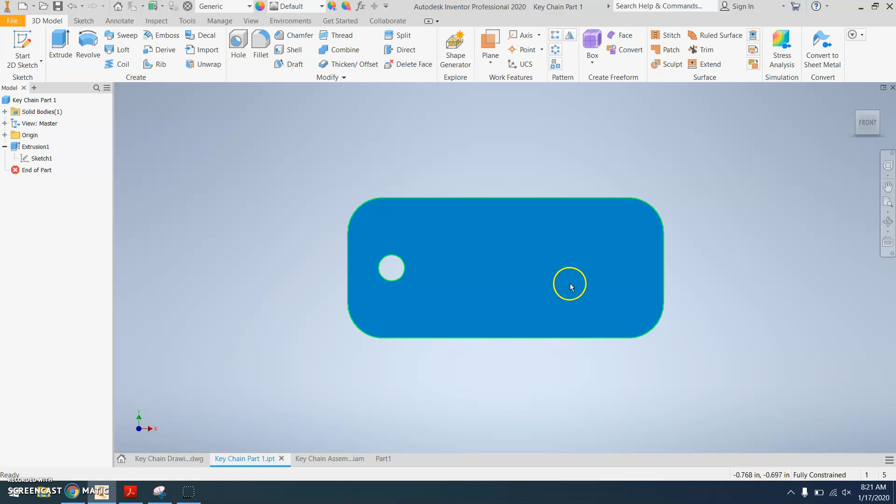First off, I'm going to show you how to do the base of your keychain. You're welcome to use whatever shape you'd like, but this is for those of you that need extra practice or are having a difficult time coming up with ideas.

So, File, New, Part, do a 2D sketch, choose a plane, and then use the rectangle tool. I made mine 2.25 - if you hit the tab key, it'll go to the other dimension - and I made this 1.

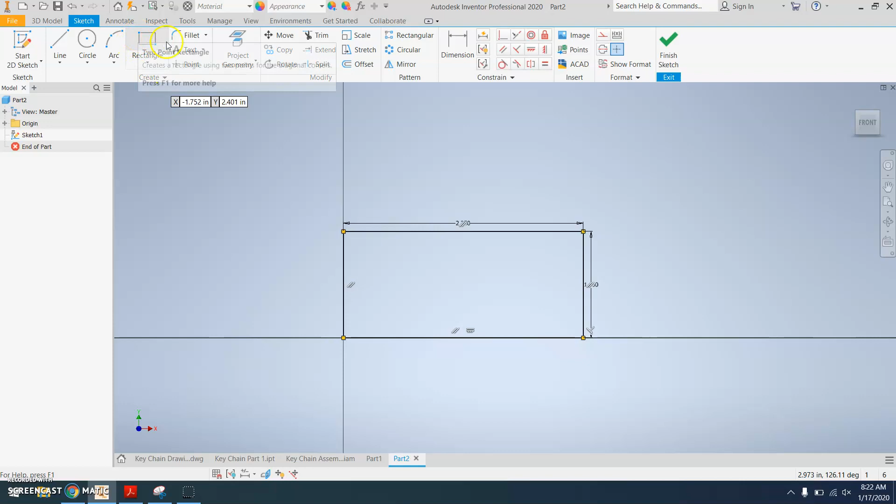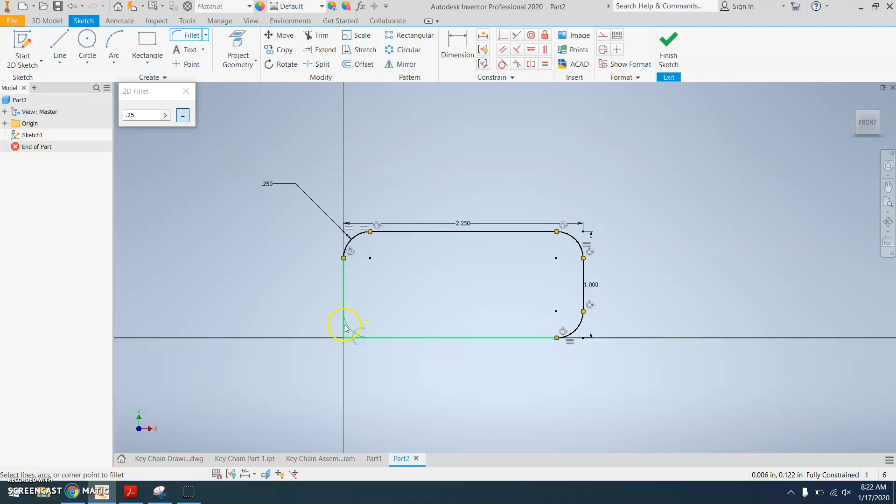So you have the outline. Now, the next step is I rounded the corners. You'll see there's a fillet button that does this. You need to give it a number for the radius you want to round, which I used 1/4 of an inch, which is 0.25, and then you touch on the two lines where they meet, and it rounds it where they meet. Okay, hit the enter button, or just get out of there, I guess.

Next, you need a hole. See how it kind of snaps to the center there? You don't want it snapping to this stuff - that's not good. So then you want this to be 3/16.

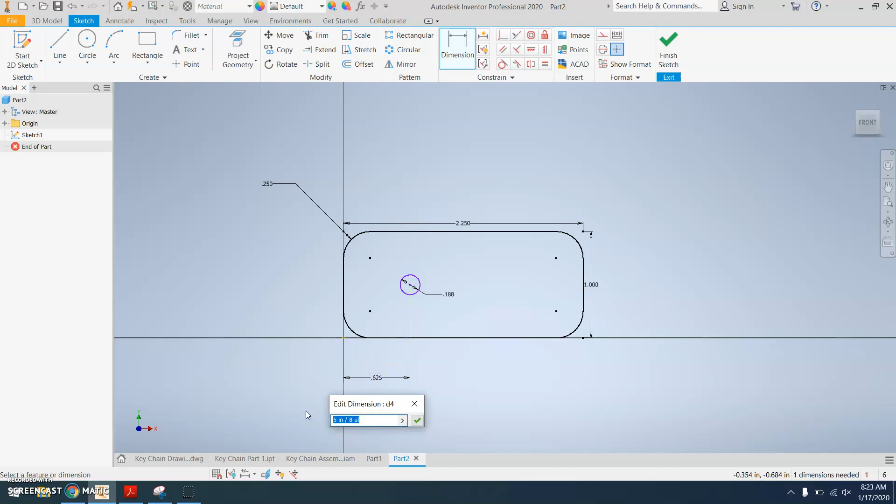Dimension it from this end. It's going to be 5/8 of an inch. And, oh, my bad - double click on that, 5/16. And let's see, I think it already snapped to the middle, but yep, it did. So that is all good.

So we've got the base, fairly good shape here. Now you can put other shapes in here to cut out.

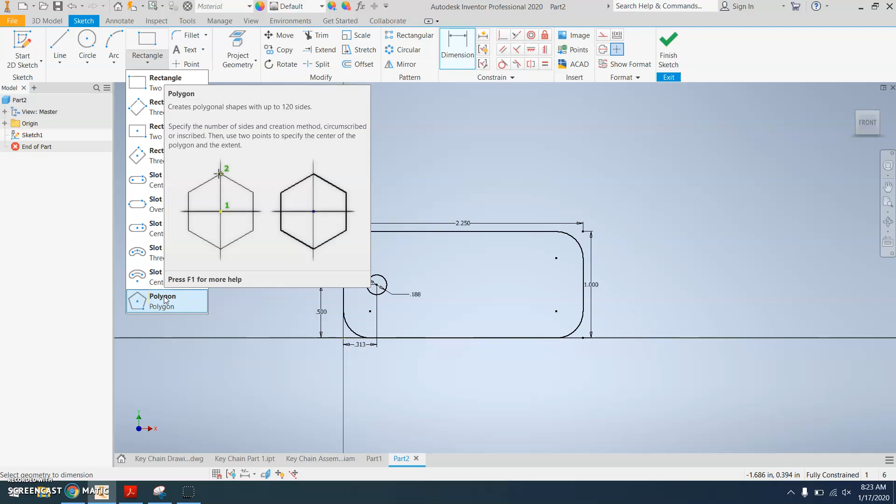I haven't shown you guys this before, but notice there are other shapes you can do, like slot, polygon - if you choose this one, you can do a polygon with whatever number of sides you want. Notice it says 120 max, that's a lot. So you can do different shapes. I think if you looked around, you could even find things like a heart, for instance. I've never done that, but I think that might be in there.

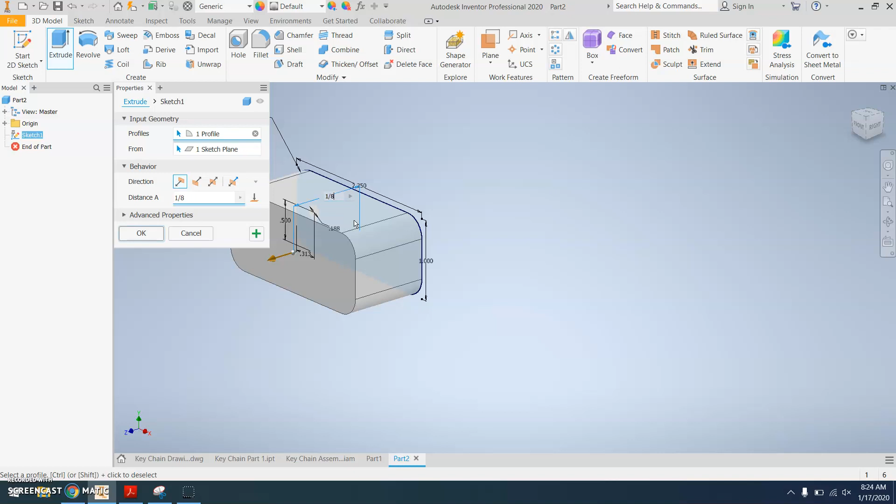So you're going to finish your sketch and then make it 3D by using extrude. Choose the shape, and I did 1/8. And then you'll want to color it in using this wheel here - select over the whole thing and then give it its color.

Make sure you're saving your work onto your H drive. I would create a new folder called Keychain, and I would call this... make sure your name's on there, the name of the project, and then what the part is.